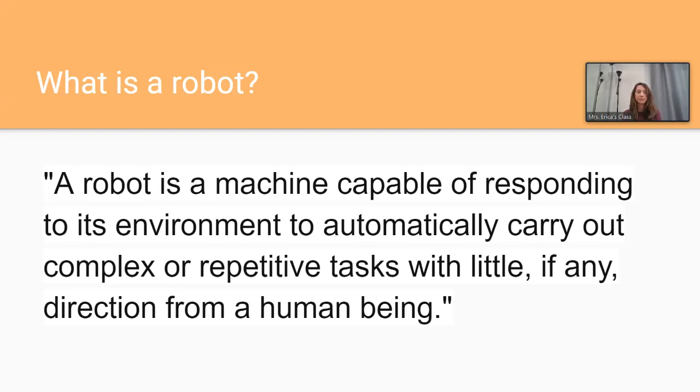So our first component that we're going to be talking about is our body frame. When you think about a human, right, we have a body, a frame, right? And then there's all the other parts of us, right? But we look like humans because we have our two legs, our two arms, right? We have our head.

Robots' bodies or frames can be any shape or size. We've looked at a lot of different robots now, so you should have a pretty good visual idea that they look really different from each other. There are some that look like humans, some that look like cars, some that look like little boxes. They have so many different shapes and sizes.

Essentially the body frame provides the structure of the robot. You need to design a structure that will help the robot complete whatever task you're asking it to do. That's part of what engineers do. When they think about the body frame, they have to ask themselves: what do I need it to do? And what type of structure would serve that purpose well, helping the robot accomplish the task?

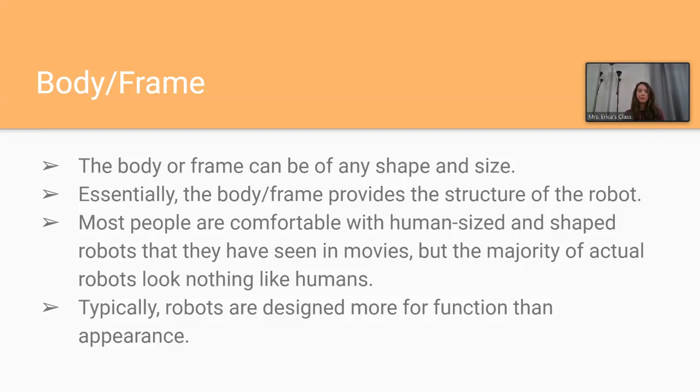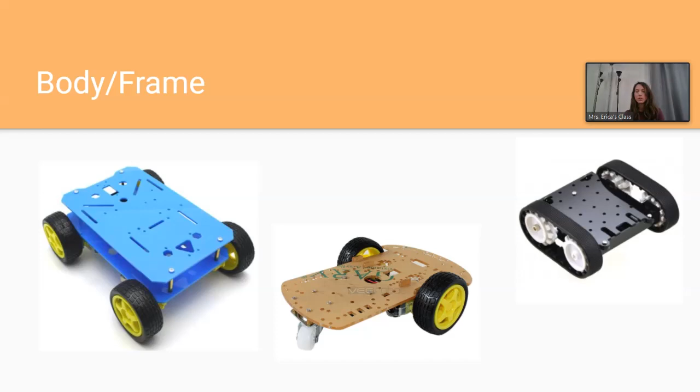Another important component of a robot is its control system. Imagine the control system of the robot is equivalent to the central nervous system of a human—it coordinates and controls all aspects of the robot.

Sensors provide feedback based on the robot's surroundings. Maybe it has cameras to give it vision, or infrared to sense heat. There are so many different sensors—it can sense how far it is from an object, or the color of an object. When it takes in all of that information, it needs some sort of control system.

That's our central processing unit, the CPU. Computers have this—it's like the brain of the computer. It filters the information and helps the robot make decisions. It takes input, processes it, and uses it. The CPU helps it make a decision about what it needs to do.

If the robot hits a wall, it knows it needs to turn around. It depends on the types of sensors and the purpose of the robot—what task it's trying to complete. But the CPU, the central processing unit, is what helps the robot do that, controlling all of those different things it's doing.

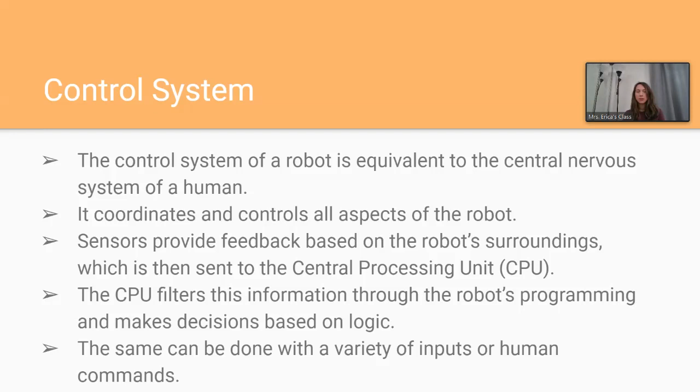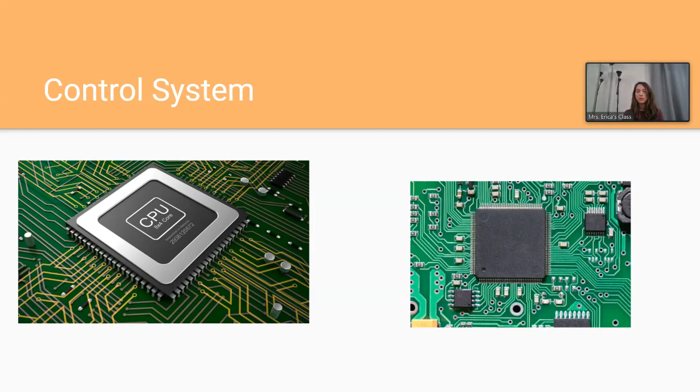I don't know if anybody has ever looked inside a computer before, but this is what a CPU looks like. It looks pretty wild and crazy, right? But robots have this as well in their control system—just another thing to consider as you're designing and thinking about robot designs.

Another main component or part of a robot is something called manipulators.

To fulfill their purposes, many robots are required to interact with their environment and the world around them. Sometimes they're required to move or reorient objects from their environments without direct contact by a human operator. Unlike the body or frame and the control system, manipulators are not something integral, meaning a robot can exist without a manipulator.

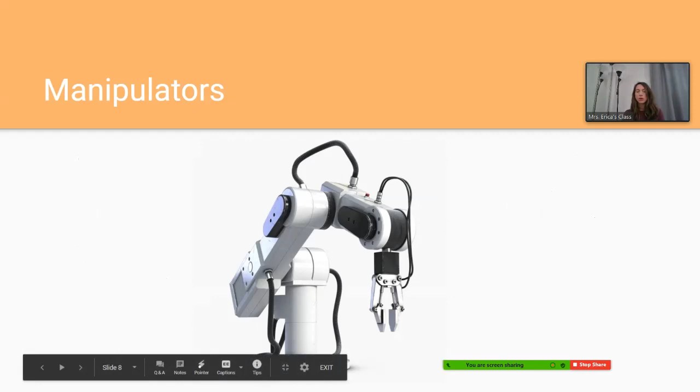I just put a picture here to give you a better idea. These little arms or grippers to pick something up would be an example of a manipulator. They help the robot to be able to interact with the environment around them.

If you remember the video with the robot that was swimming under the sea, it looked like a mermaid, and it had hands where it could actually grasp and touch things. That would be an example of a manipulator. It helps the robot interact with its environment and the world around it.

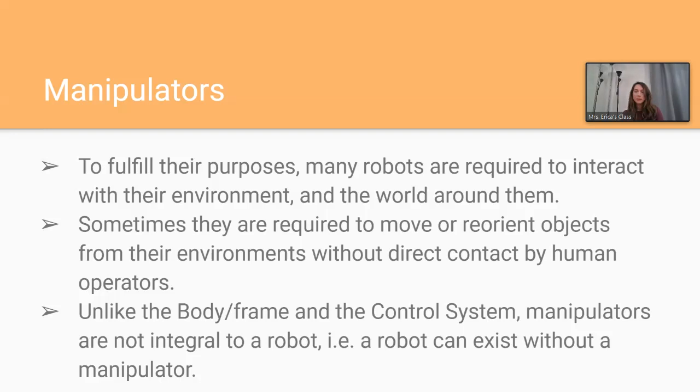Robots in factories might have a lot of these different manipulators to help them. So again, they can be a part of the robot, and they could take on a lot of different shapes and forms because robots are all so different. Okay, let's talk about the drivetrain.

This is really important. Some robots might be able to perform their task from one location, but a lot of the time it's required for robots to be able to move from location to location. And that requires a drivetrain.

What does a drivetrain consist of? A drivetrain consists of a powered method of mobility. Mobility means when you say something is mobile, that it can move around. So a drivetrain powers the robot to be able to move around.

So for a humanoid robot, what would its drivetrain consist of? Legs, right? Two legs. A car, what would its drivetrain consist of? The wheels. So a lot of robots do use some type of wheeled system, but there can be so many different varieties with your drivetrain.

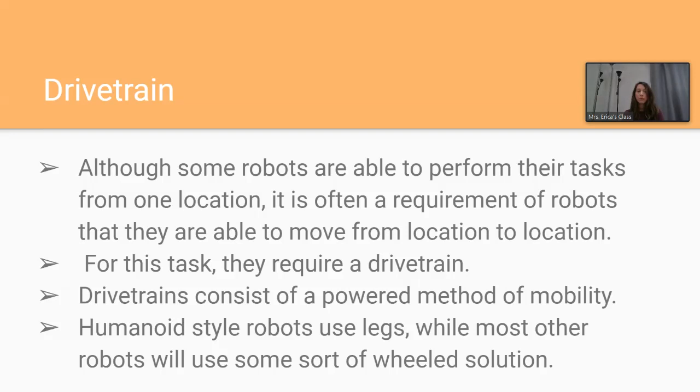When you're programming your robot, you'll notice in the code there will be something that allows you to control the drivetrain—which direction it's going in, how fast it's going. This is important because the robot needs to be able to move to perform whatever task we're asking it to do.

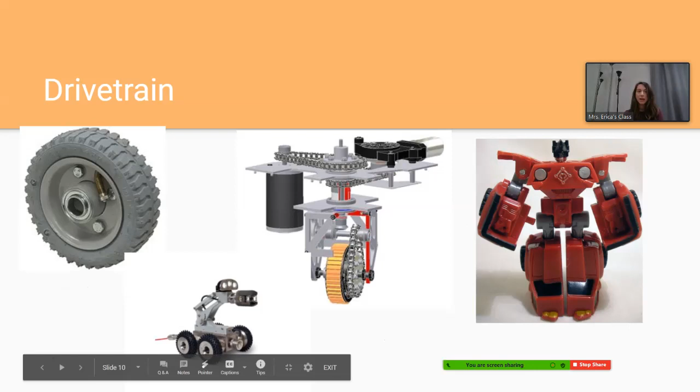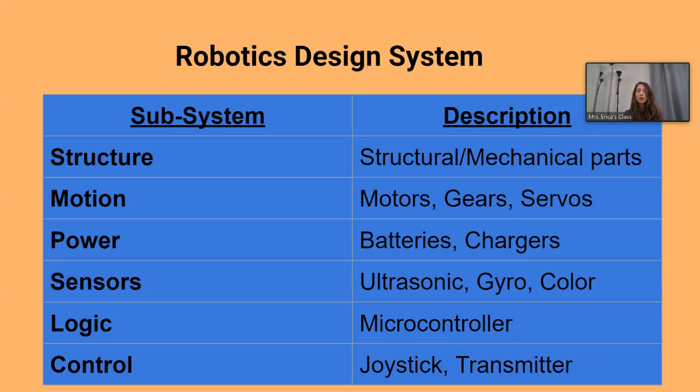So that is that. Next week we're going to be talking about some of the subsystems of the robotics design system, and we'll talk a little bit more about specific things such as the sensors and different types of sensors. We'll get a little bit more in depth into these things, so hopefully you'll have a better understanding of what it takes to actually create and design a robot.